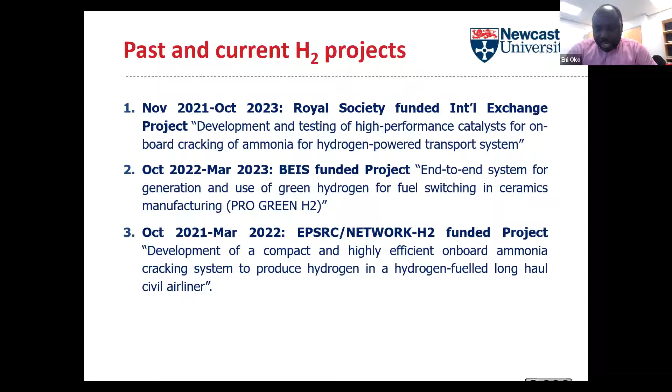Right, so in my presentation, we have a quick look at the background. I know that will probably be trivial for many persons here, but just bear with me. I think it helps to build the story I'm about to tell you. And then I will talk about hydrogen storage and ammonia as a hydrogen carrier, look at a bit of the R&D landscape, the greatest news out of this area in the past couple of years. And then I can talk about the model development and the results. I'm sorry if you are here solely for the model development, it's coming very last.

Right, so in terms of background, net zero targets in the UK and many countries. And of course, fuel switch is a key strategy for delivering net zero targets, especially in hard-to-abate sectors. This will include the transportation sector, heavy industries, and in the case of the UK and other cold nations, this will also include domestic heating. Hydrogen is recognized as a key fuel, so if we are going to do fuel switch, it has to be hydrogen for most cases. And the UK already has a hydrogen strategy in place, which is expected to help build the momentum to scale green and blue hydrogen production.

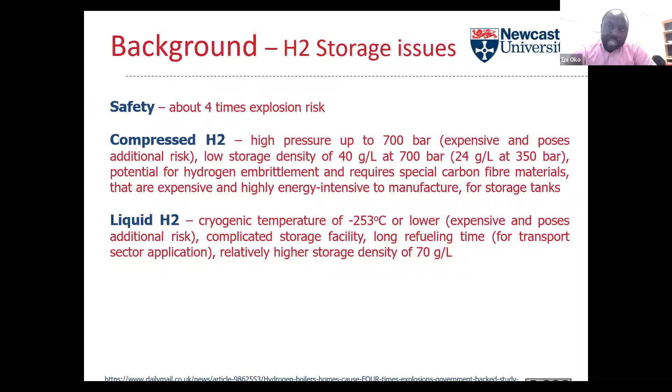But we can have an ammonia carrier rather than hydrogen. In other words, ammonia acting as a carrier for hydrogen. And at the point of use, this ammonia can then be chemically broken apart to extract your hydrogen. If this solution is adopted, it has far higher storage density compared to transporting or storing hydrogen as itself. And the other good side is that ammonia handling is very well established, and this can be done at relatively mild conditions, such as 10 bar and 25 degrees C.

So ammonia transport, long-term transport, large-scale storage are all operations that are well established in the industry. Right? So on that basis we are certain that hydrogen has to be transported by some sort of carrier and not as itself, especially at very large scale. Right, so there are different propositions regarding how hydrogen can be transported and stored at commercial scale. And each of them have their own benefits and advantages.

The absorption technique has low energy requirement for recovering your hydrogen. However, the operating temperature is still very low. And then the hydrogen carrying capacity is also low. The other one is chemical storage using unsaturated liquid compounds. Again, low hydrogen storage capacity. The reactor designs are a lot more complicated, and they require very high energy to extract the hydrogen. And generally, the technology readiness level is still very low.

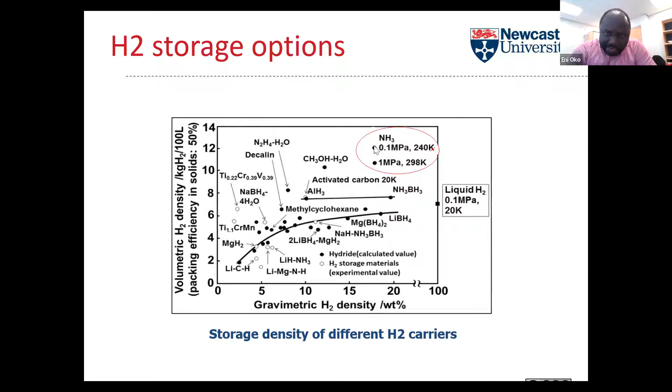Okay, and it can be stored at mild conditions. Then, of course, this is just a chart that shows you where ammonia is compared to lots of chemical compounds that can be used for hydrogen storage in terms of the energy density. And you can see that ammonia is far ahead of most of them, right?

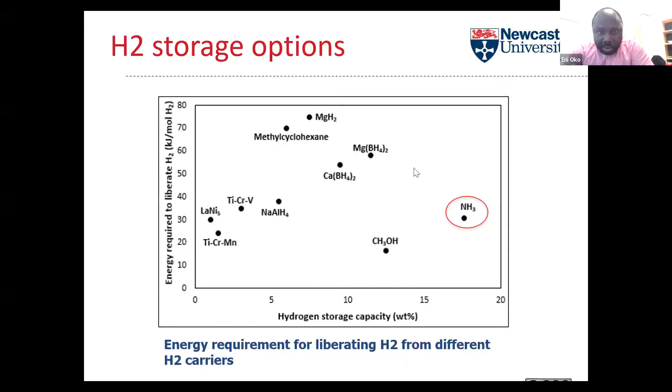Then this shows the energy requirement for liberating hydrogen from ammonia and, of course, other popular hydrogen carriers. And you can again see that the energy requirement for liberating hydrogen from ammonia, compared to a lot of them, is actually relatively lower.

Ammonia is considered as having the potential to form an important part of the hydrogen supply network in the UK and in many countries. And here is an illustration of how this looks. Different routes have been proposed, either having a centralized ammonia cracking system closer to the end users, or having an ammonia cracking system at every end user location.

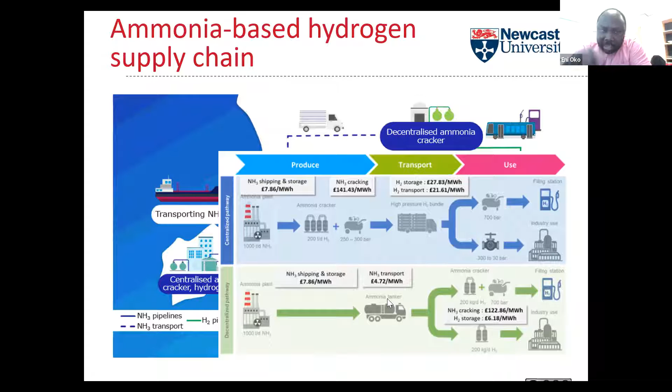There is a BEIS report that was commissioned a few years ago, where they tried to look at the cost of each of these solutions, and which showed that the decentralized routes, in other words, having ammonia cracking systems at different end user locations, is actually going to be relatively cheaper compared to having a centralized ammonia cracking network.

The other point is that there is also potential for having cracking ammonia on board, so like marine systems and heavy transport systems. A company in the US called Starfire has done lots of work in this area. And this is essentially how it looks, where instead of storing hydrogen, you can be storing ammonia on board. And then at the point of use, it can be pumped through a cracking system.

Essentially, this particular setup here is looking at partially cracking the ammonia, so that what we have going into the engine would then be a mix of partially cracked ammonia and, of course, fresh ammonia. They've done tests that include cracking around 30% of the ammonia and then mixing that with the remaining 70% ammonia. So there are different reactor designs.

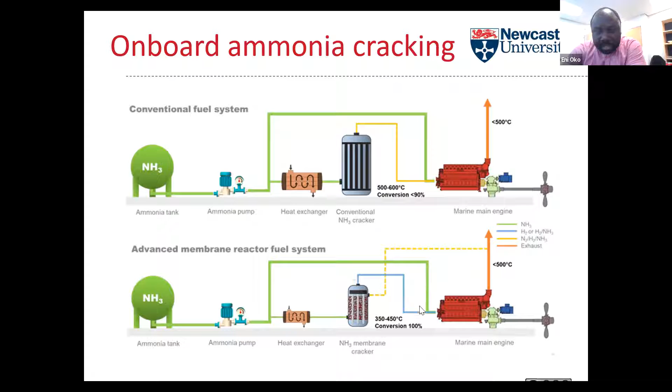The second design is actually separating the nitrogen, right? Whereas the first design is mixing everything that is being cracked as it goes into the engine. This second design separates the nitrogen and takes nitrogen out, and it shows that this is a lot more efficient. There has been quite a bit of activity ongoing in the past couple of years in this area.

CSIRO in Australia has done some demonstration of an ammonia to hydrogen pilot system for fueling fuel cell vehicles. And then, of course, there's the TransHyDE project in Germany, where they are looking to build this massive hydrogen transportation infrastructure, and ammonia is expected to play a significant role in the TransHyDE network. A company called Ammoref is working on the ammonia cracking system.

Then in the UK, the UK Science and Technology Facilities Council, working with Reaction Engines, has come up with a gas turbine concept for an aircraft engine that will include an ammonia cracking system. Okay.

In the US, NASA is funding a very similar project, which is being led by the University of Central Florida. The UK last year awarded a grant for the Tyseley project, which again involves some ammonia cracking and is expected to deliver around 200 kg per day of hydrogen to a fueling station.

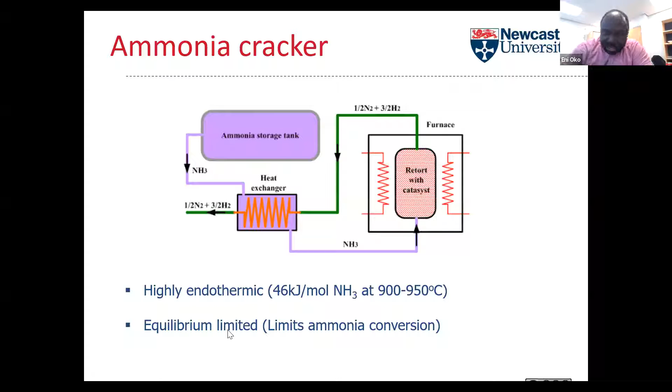Right. So the main point now in ammonia cracking is actually the reactor. While everybody has been talking about their concepts, the key challenge here is the reactor, right? The reaction is highly endothermic. The energy intensity is very high, and the other problem is that it's equilibrium limited, and this limits the amount of ammonia conversion. We did a tubular reactor model at the start of our project.

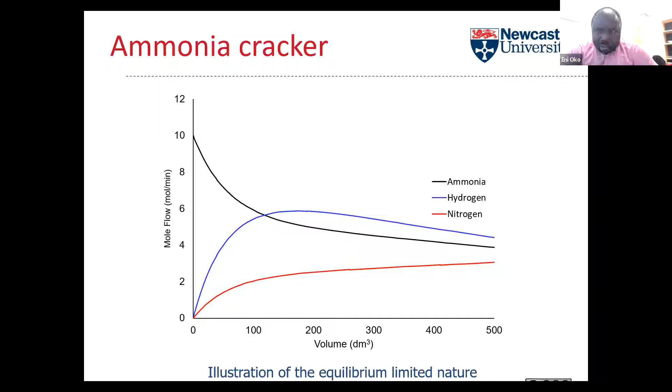This is a part of the results that we got from our tubular reactor model. What this shows is that there is a limitation on the amount of conversion that you can achieve with a tubular reactor setting. Then, of course, there are different technologies for cracking: either electrochemical decomposition, which is extremely new, or thermal catalytic cracking.

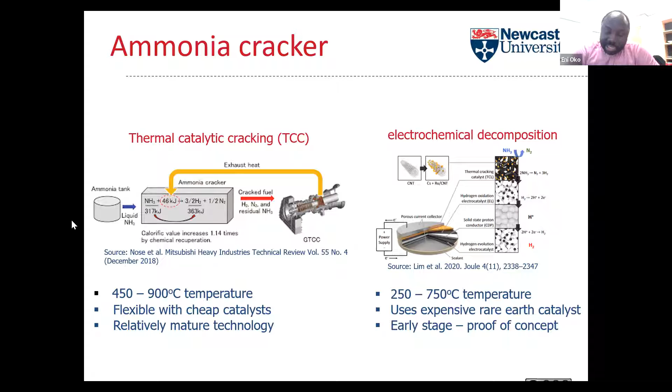What we are looking at in our project is based on thermal catalytic cracking for a number of reasons. It's much more established. The key challenge is essentially in the reactor and catalyst development. Then these are the two types of reactors, essentially. Either tubular reactors, where the product then goes through some separation where you separate the hydrogen from nitrogen and any unused ammonia.

While this is okay for many cases, there is a very high potential of low conversion because, as I've mentioned, of the equilibrium limitation for this particular reaction. The other type of reactor is the catalytic membrane reactor, which is process intensified. You have a catalyst somewhere at the center, and you have a membrane separator layer.

So essentially, as the hydrogen is being formed, it's taken away, and that drives the reaction to remain in the forward direction. By so doing, we can achieve very high conversion. We can also achieve very high hydrogen recovery. And the other important point is that we can also have a reactor that is smaller in size compared to the tubular reactor setting.

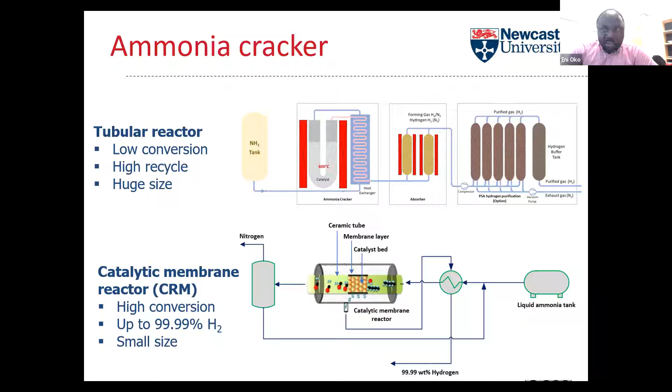For our model, we are working essentially on the catalytic membrane reactor. But as I say, at the start of our project, we also looked at tubular reactor designs. This is a simplified format of the membrane reactor that we have worked on, with quite complicated kinetics because it also tries to include the kinetics of the membrane itself. We've modeled this as a custom model because this type of reactor model is hardly available in commercial simulators.

And we have created a custom model from scratch in a software called Aspen. And we have tried to look at different catalysts. But what I'm going to show you here is just for the lithium amide catalyst using a palladium-based membrane.

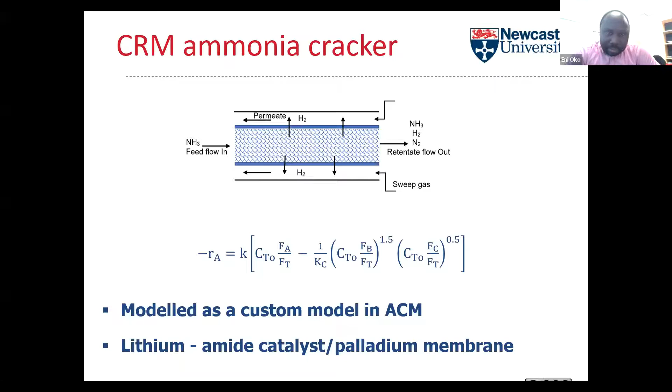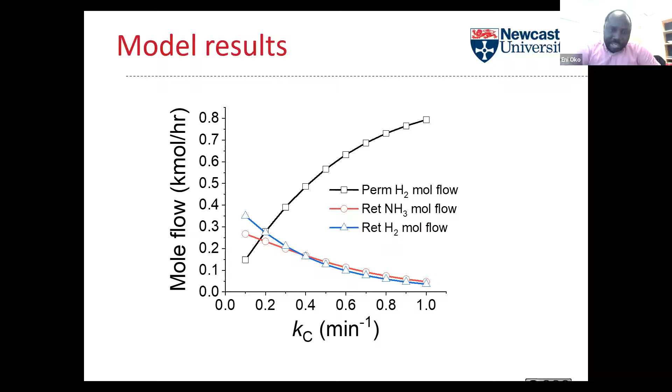So we have a number of analyses that we've done with our model, and this was looking at different membranes with different permeability coefficients, and we could see that, of course, the ones with higher permeability coefficient delivered better recovery for hydrogen.

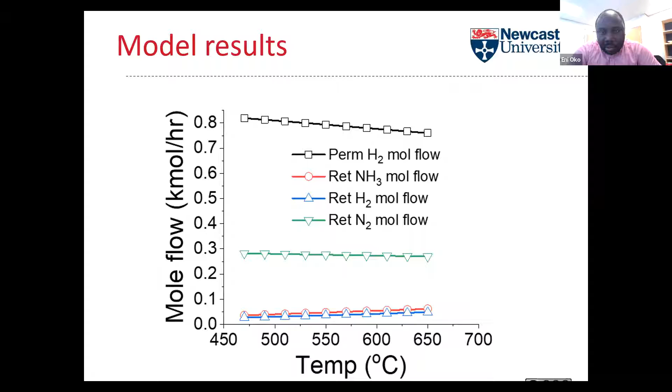And we have also looked at specific points in the reactor and looked at increasing the operating temperature, starting from around 470 degrees all the way to around 650 degrees. What we found is that higher temperature was actually not good for the membrane, because as we have higher temperature, the hydrogen permeability declined, although it declined by just a little amount.

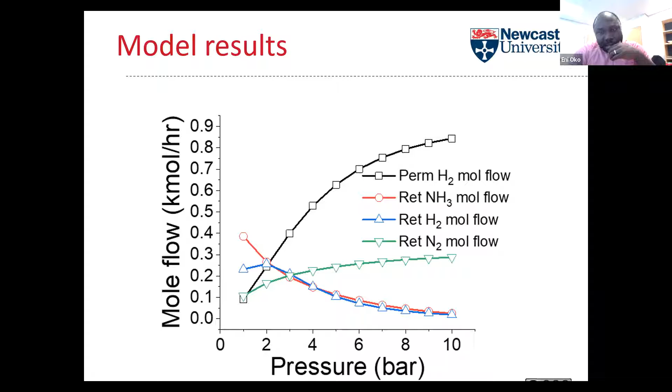Another work that we had done, which is part of a different project, was looking at, because most of the studies and companies that are looking at onboard applications seem to focus only on the reactor, so to speak. So part of the things we have done in one of our projects was to look at the space that you need to store ammonia on board. And in this particular case study, this was gladly supported by partners from Cranfield University Aerospace Center.

And we've done some comparison with standard jet fuel, looking at an A380 massive aircraft, and just placing them side by side in terms of the energy requirement and, if this was to flip around and you use ammonia, how much storage space you will need to store this ammonia.

And our analysis showed that ammonia compared to jet fuel in terms of volume ratio, you will have a volume requirement of 2.65 for ammonia, greater than that of the Jet A fuel. So we worked out it in terms of volume, and it is a lot of volumetric requirement for ammonia storage.

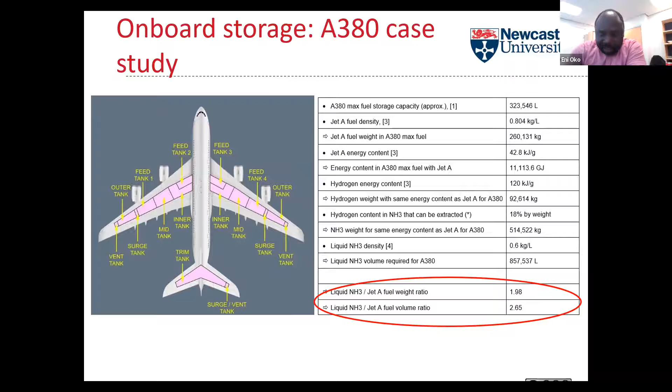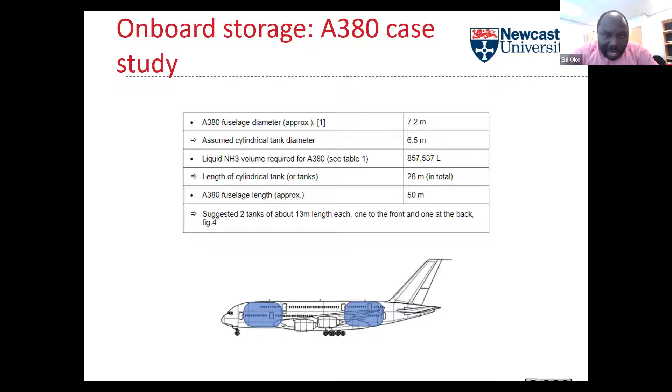And what we have learned from our partners in aerospace is that at 10 bar, it's impossible to store in the wings. And this is part of the things that we found out. And then they've proposed that if this sort of arrangement goes ahead, they're going to have ammonia storage tanks within the body of the aircraft, rather than the wings. And the volume that is required is huge.

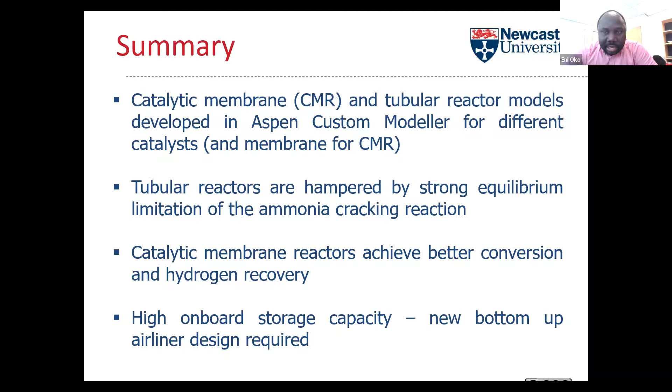All right. So in summary, we have developed CMR reactors and tubular reactors for ammonia cracking in Aspen Custom Modeler. The tubular reactors, as we found, are greatly hampered by strong equilibrium limitation of the ammonia cracking system. The catalytic membranes have shown better conversion and hydrogen recovery. And then in terms of onboard storage capacity, a sort of new bottom-up airliner design is going to be required, and not retrofitting existing design.

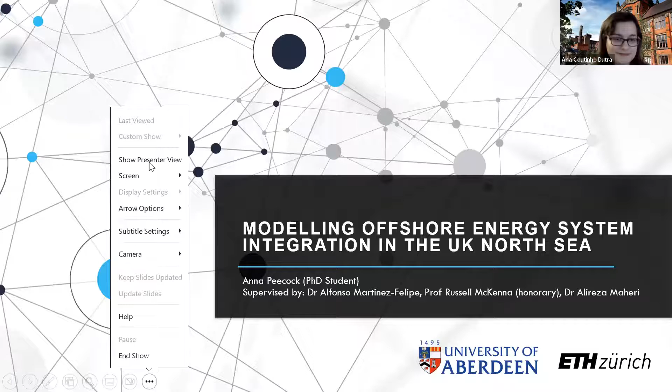Thank you very much. Let me just share my screen. Sorry, I'm going to go. Oh, perfect. Thanks. Oh, sorry, guys. Okay, hopefully you can see my presentation now. Yes. Perfect. Right, let me just make sure I can. Right, okay. Hi everyone, and thank you very much, Anna, for that introduction.

As you say, my name is Anna Peecock. I'm currently in my second year of my PhD at the University of Aberdeen, and I'm looking at modelling offshore energy system integration, specifically in the UK North Sea. Right now, this isn't clicking through.

Okay, so I firstly just wanted to quickly introduce my background. As you said, you've already covered it, but I started doing my undergrad at Durham, predominantly focusing on chemistry, which I did really enjoy, but quite early on, I realized I was drawn to the practical applications rather than to the theory itself. So I took a step back from academia. I went and worked for an energy company for a year, but I quickly realized again that I really enjoyed learning, and I was really keen to do more.

So I went back in and signed up for my master's in GeoEnergy at Edinburgh, because I'd realized that the energy sector was definitely somewhere I wanted to stay. And from that, I was then able to apply and luckily get the funding for the PhD in Aberdeen, where I currently am.

So throughout the presentation, I thought I'll give you a bit of context and background to my project itself. And then I'm going to delve deeper into the hydrogen related parts. As you'll see, I'm looking broadly at offshore energy system integration, but two of the hydrogen specific sections I think will probably be more relevant to this forum. We're looking at mapping hydrogen storage capacities of UK gas fields and also analysing limits of electrolyser performance.

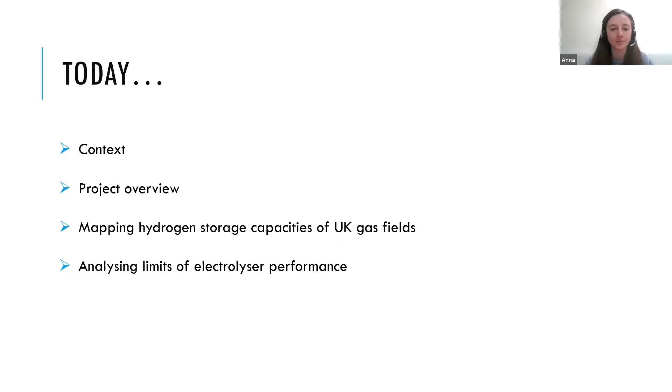So just to give you a bit of context. As our energy sector becomes more complex and has a greater degree of diversification and new technologies, it's really important that the models we use to describe our energy systems are able to reflect this. So as, for example, power, heat, transport, domestic and industry, energy storage, they're becoming far more interconnected. And so if the models that influence our policies can't accommodate this increasing degree of interdependency, then we risk producing inaccurate forecasts and potentially missing decarbonisation targets.

So this is particularly evident when it comes to offshore energy system modelling. The current models often resort to aggregating significant amounts of data. And in an area like the North Sea, which is home to hundreds of energy assets and is a key region for the UK and its other bordering countries' energy transitions, it means that we're unable to analyse the potential development pathways and evaluate the pros and cons of different strategies if we can't look at this in enough detail.

So that's the challenge that I am trying to address within my PhD in collaboration with my supervisors and some other people I've had the opportunity to work with, both in academia and industry. So through a combination of model development and experimental research, my aim is to evaluate potential synergies between the UK oil and gas sectors and the offshore wind sector, to explore both economic and environmental benefits that can be achieved through the co-exploitation of the two of them.

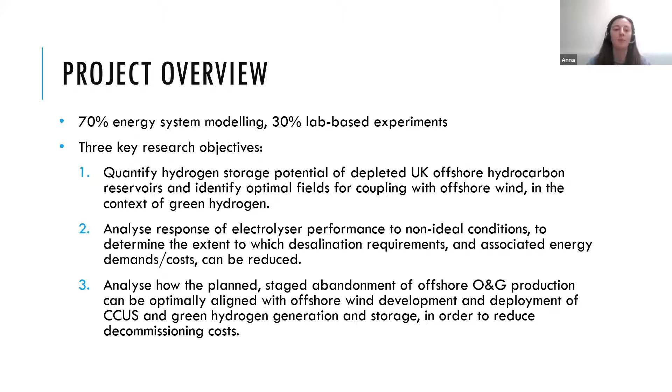So I'm developing an energy system model to explore and optimize future energy scenarios for the UK, hopefully with the capacity to guide long-term energy transition policy decisions. And basically the main output will be a roadmap for UK North Sea decarbonisation. So we'll be looking at individual assets on a really high resolution basis. So we can produce a roadmap, potentially for which oil and gas fields or platforms can be decommissioned first, so as to ensure energy security, but benefit us throughout our energy transition.

But as I said, the modelling side of it is both very technical and probably not as relevant here. So I thought I'd talk a bit about some of the work we've done looking at hydrogen. So firstly, thank you to Dr. Oko for introducing this. It means I don't need to cover as much of the background, as I'm sure you're already familiar with it.

So we approached this study from two angles. One, quantifying the amount of hydrogen that we actually need to satisfy the UK domestic heating demand. So in both the case of a 100% conversion to hydrogen, which I would argue on current timescales is less likely, but also the 20% blending scenario that appeared in our energy white paper from BEIS, and also in our national decarbonisation strategy.

So we're looking at heating on the one side, and then we also wanted to determine the hydrogen storage capacities of depleted gas reservoirs in this context. So do our gas reservoirs, which are probably our largest geological storage option, provide the storage capacity that we would need for such a large hydrogen requirement?

So as I'm sure you're aware, just for context on heating, in the UK we import a lot of our natural gas, both as natural gas and LNG. And in theory, we buy it when it's cheap, inject it into a storage reservoir, which we know is adequately sealing because gas has been stored there for millions of years, and then we produce it as and when it's needed.

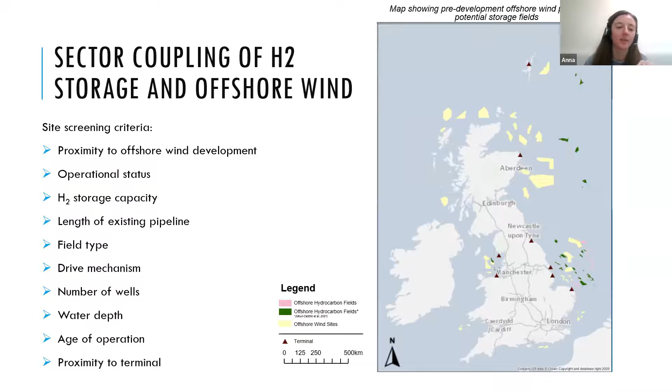So here you can see the 43 of the 121 existing offshore wind projects that are either in their early planning or pre-development phases, those where the incorporation of hydrogen is far more realistic and attainable. We then, in consultation with a team of industry experts from a range of different backgrounds and specialisms, developed a weighted criteria framework based on which we could rank the fields basically in terms of suitability for coupling. And you can see the fields in relation to the offshore wind farms on the map on the right, and then the criteria that we applied weightings to.

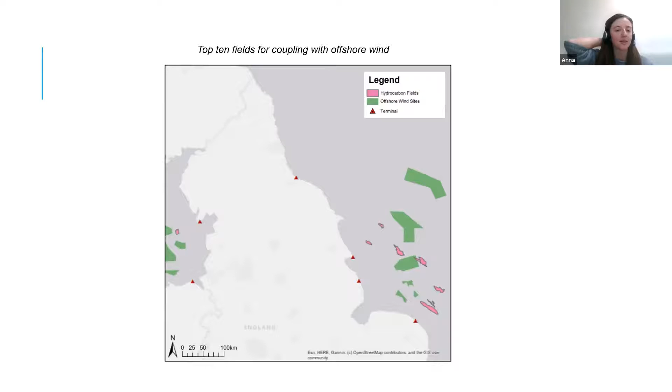And then the next phase of this research is to determine the most suitable fields for storage based on intrinsic parameters, so reservoir conditions, cushion gas requirements, and then compare these results to a cost analysis for fixed and floating offshore wind on the UK continental shelf. So basically to see which fields that we consider optimal for developing as storage sites are within close proximity to an economically attractive area for wind developers. So almost working in reverse to the way we did it, where we prioritized existing wind developments.

But the other side of the hydrogen-related work we're doing is analysing the limits of electrolyser performance. So for both offshore and coastal green hydrogen production, seawater presents an obvious solution for the significant water demands of electrolysis. However, almost all commercial PEM electrolysers, which we don't need to use, but we often choose to use because they can accommodate the variable electricity output from offshore wind generation, which we know is not consistent and fluctuates massively, require water that has a dissolved salt content of less than 10 parts per million.

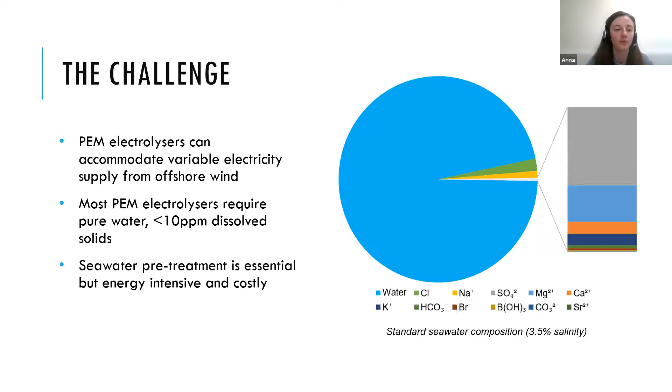So we therefore want to determine the extent to which our conditions can deviate from ideal without compromising either the rate at which hydrogen is produced or the ability of the electrolyzer to continue producing hydrogen for a given period of time. So we're doing this by testing the effect of incrementally increasing total dissolved solid content. So we're talking really, really small increments, so 0.01 per mille increments, so parts per thousand, that is, on the production rate.

So testing the effect on production, and then also analysing the surfaces of the membranes used to assess the extent of degradation. So it's all well and good being able to maintain a similar rate of production, but if those membranes have to be replaced twice as often, given that they're also quite a big cost and an ongoing cost for electrolyzers, that would defeat the point. So we basically want to find that sweet spot where we are able to reduce desalination requirements, but also not incur greater costs due to increased level of impurities. So yeah, that's work that's ongoing at the moment that we're just getting stuck into.